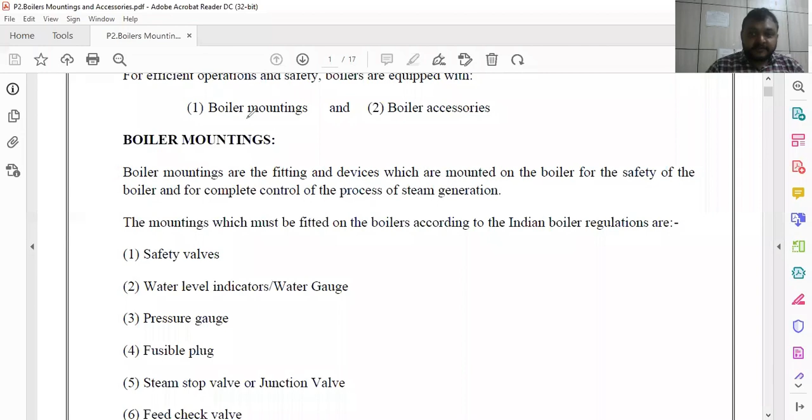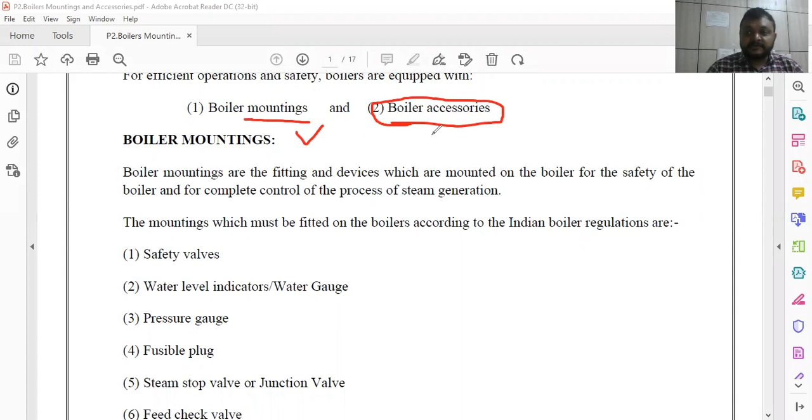So here you have to keep in mind 2 points. One is boiler mountings. Boiler mountings are specifically applied to boilers for the purpose of safety and effective performance, and boiler accessories are mostly used to improve the performance or efficiency of the boiler. Now, the fundamental difference between boiler mountings and boiler accessories is that boiler mountings are compulsory attachments to the boilers, whereas boiler accessories are optional attachments. If we add the boiler accessories, we can improve the performance or efficiency of the boiler.

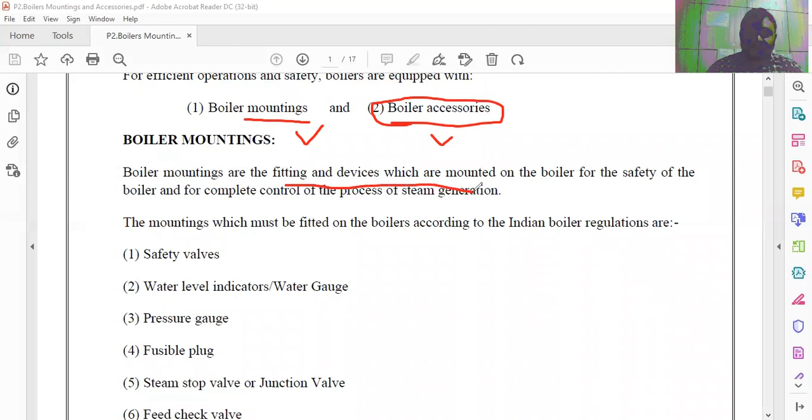So we have to see different kinds of boiler mountings first, and then go for boiler accessories. Boiler mountings are fitting devices, normally mounted over the boiler for the purpose of safety, so that we can effectively control the performance of the boiler from water to steam generation.

According to the Indian boiler regulation, the important boiler mountings which are compulsory to be fitted over the boilers are safety valves, water level indicator, pressure gauge, fusible plug, steam stop valve, and feed check valve. These are the important boiler mountings.

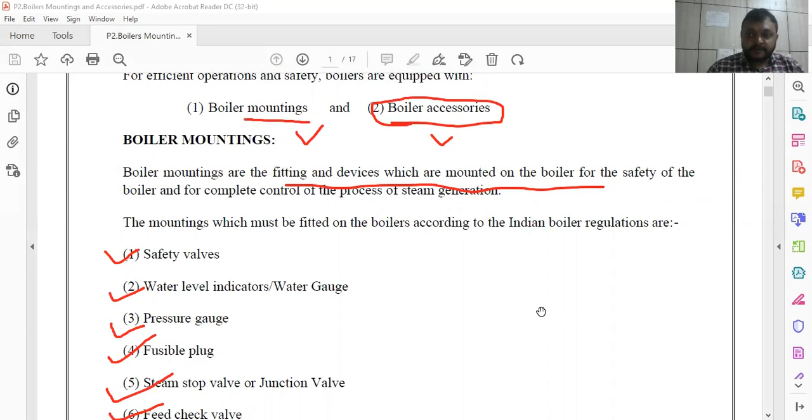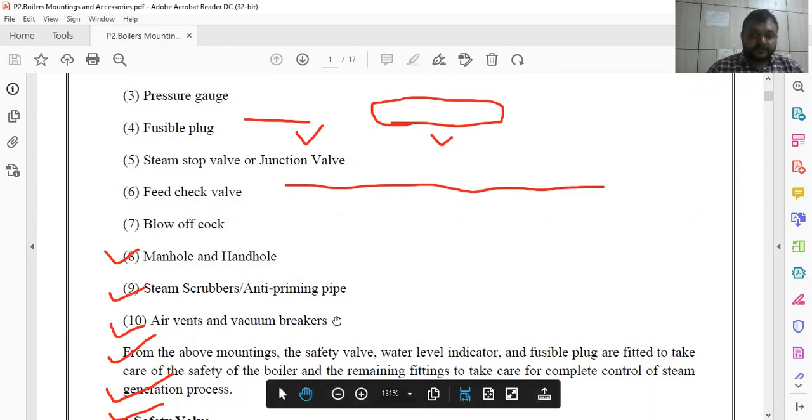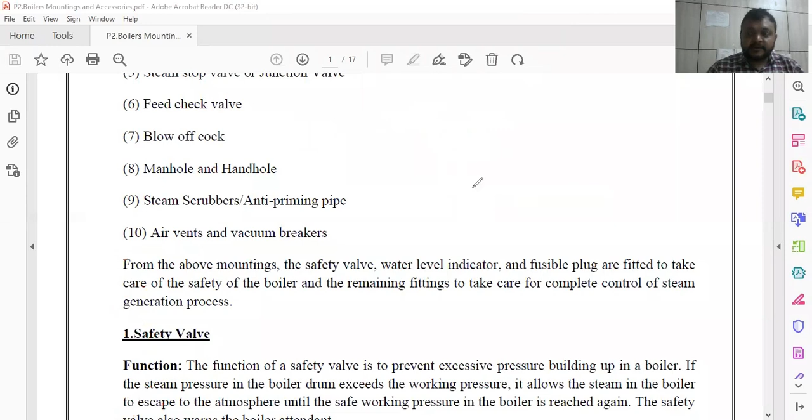Now we will see one by one the performance of each and how they help in the performance of the boiler: blow off cock, manhole, steam scrubber, air vent, and vacuum breaker. These last two are not so important, but we have to see each one by one so that we can easily understand how they help perform the boiler in the most effective manner possible.

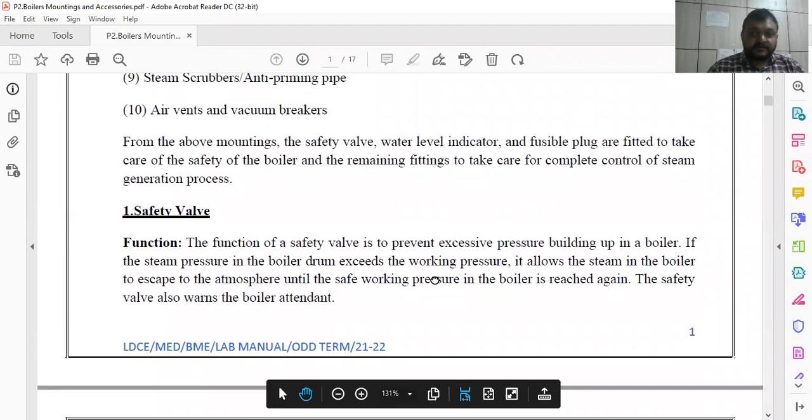So you have to see, we have the safety valves. Safety valve, first of all, we have to see the safety valves. Safety valves are basically used to prevent excessive pressure building up in the boiler.

So normally what happens in the boiler? In the boiler, normally we have to generate steam from the water, so that whenever steam is generated, water is boiled, temperature is increased, pressure is increased. So sometimes it may be possible that excessive pressure builds up in the boiler shell due to steam.

That can be managed by means of the safety valve. It is a kind of, or we can call it equivalent to, the safety valve of the pressure vessel that we use in our kitchen. So it is more or less the same.

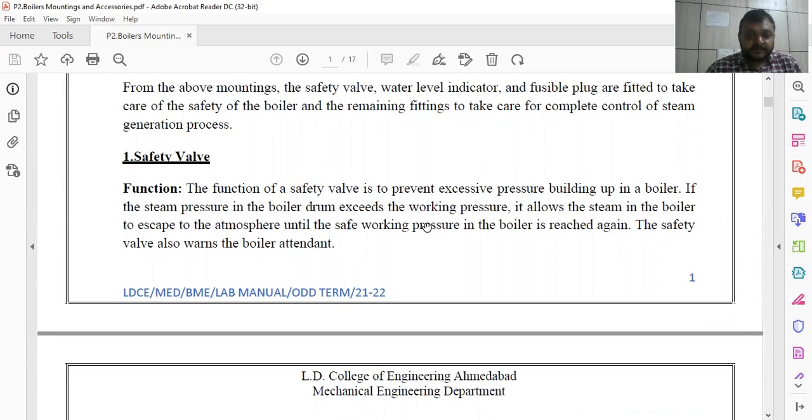The main principle of the safety valve is that the valve is pressed against the seat, just like our pressure cooker, against the seat through external force. So whenever steam pressure is increased inside the pressure cooker, what happens? That valve is lifted up because of the steam force, and excess steam is thrown away, so that pressure inside the pressure cooker remains constant.

So the working pressure is restored. That is the main concept, and a similar working condition is applied over the boiler with this safety valve. Safety valves are normally located above the steam pipes, in the steam space in the boiler.

Where steam is stored, steam is generated and then stored over the boiler shell. At that point, safety valves are normally fitted, and at least 2 safety valves should be there according to the act.

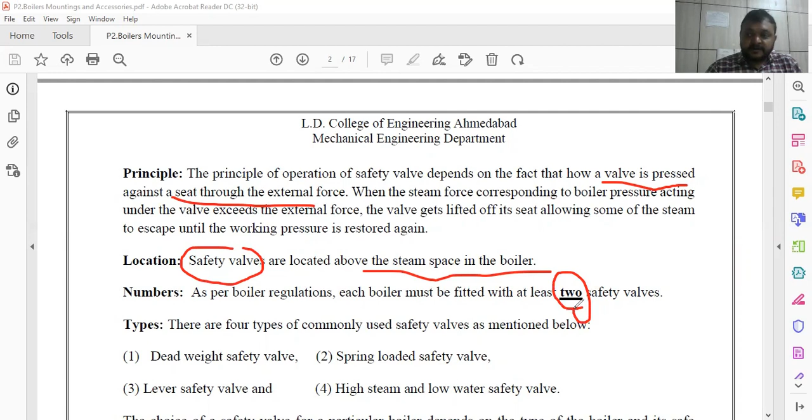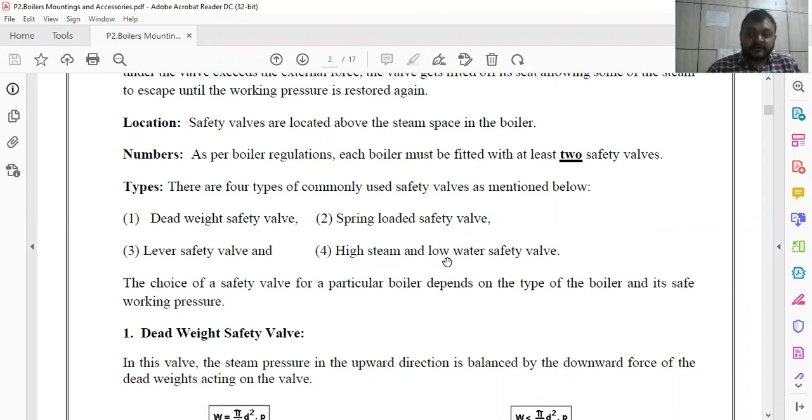Now, safety valves are of various kinds depending upon the working principle. You have the dead weight safety valve, which is normally used in our home kitchen pressure cooker. But spring loaded safety valves, lever safety valves, or high steam low water safety valves are also used in the boiler. The function remains the same. You can see the figure.

This is the steam space of the boiler where steam is on the upper side and water, because of its weight, is on the lower side of the boiler pipe. So here, what happens, just have to see.

This is the safety valve. The pink color is the safety valve, and force is exerted. Steam force is exerted over this valve. So whenever steam pressure exceeds, what happens?

Steam pressure acts over a pipe of diameter d. For example, load is equal to area into stress, or pressure. So pressure P is equal to load divided by area, as we discussed in the previous lectures. So load is equal to area into P, where area is the area of the pipe, pi by 4 d square, where d is the diameter of the pipe and P is the steam pressure.

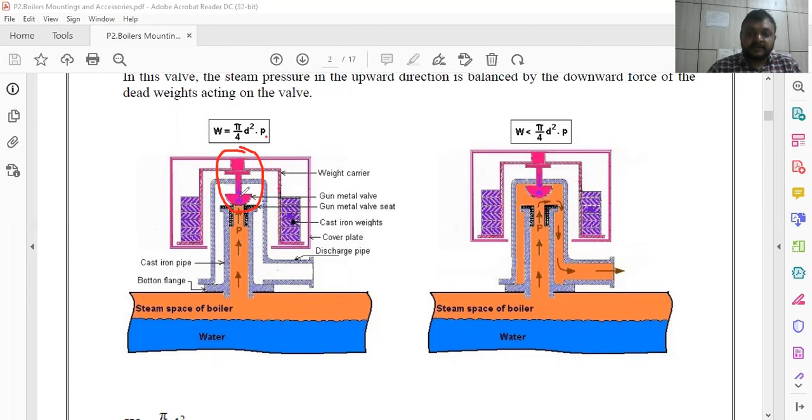So if you know the steam pressure, you can easily find out the load acting over the safety valve. Depending upon the load, you can set the weight of the safety valve, so that depending upon the pressure, it can be lifted when needed, or when steam pressure exceeds a certain limit.

So this is the closing of the safety valve, and in this figure you can see the opening of the safety valve. Whenever the safety valve is lifted, the excess steam is passed through this line and thrown away, so that steam pressure becomes optimal, as per the requirement. So this is a very fundamental, simple operation of the safety valve, and it works on dead weight.

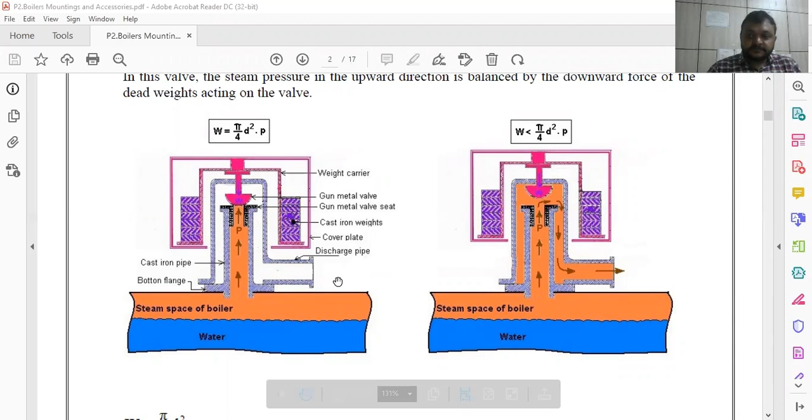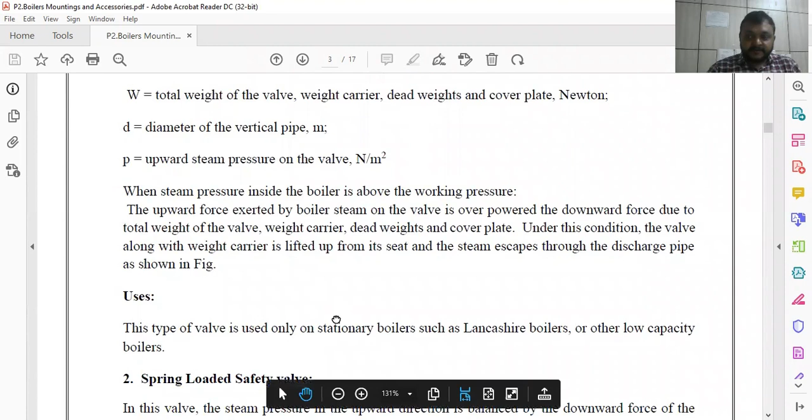So it works on dead weight. Now, as I already explained how we can calculate W and how we can find out the diameter, normally this kind of safety valve is used in Lancashire boilers or low capacity boilers.

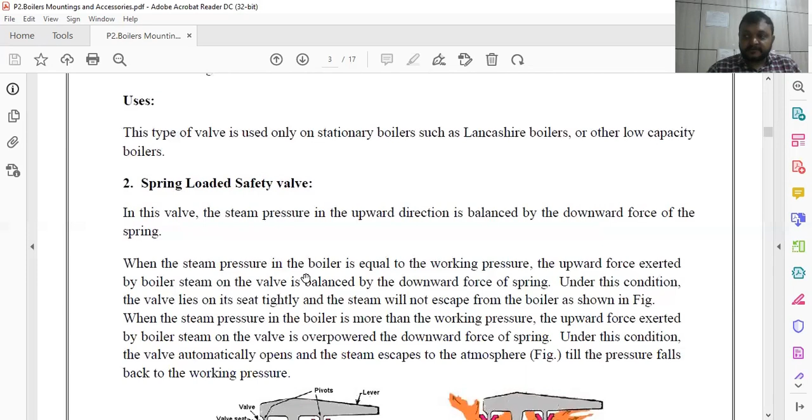But why are we using the dead weight safety valve on our pressure cooker? Because it is a low capacity kind of pressure vessel, normally used in the kitchen. But for a heavy loading condition, a similar thing is there.

But instead of weight, we are using a spring. Spring force is normally used to lift this safety valve. So here, instead of dead weight, spring force is exactly equalized to W. W means pi by 4 d square into steam pressure P is equal to spring force.

So whenever it becomes equal, up to equality, this safety valve remains closed, and otherwise it will open when steam pressure exceeds. W, meaning steam load or steam force, becomes more than spring force, and the valve is lifted and excess pressure is thrown away like this.

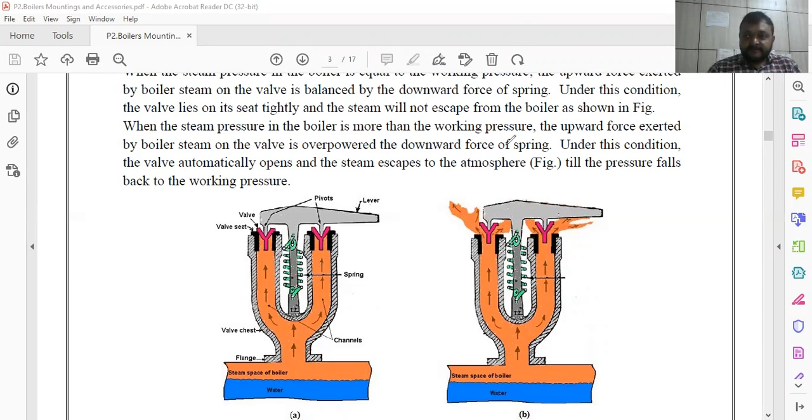This is a spring loaded safety valve, based on the principle that a spring is attached. High capacity boilers normally use these kinds of things in high pressure boilers.

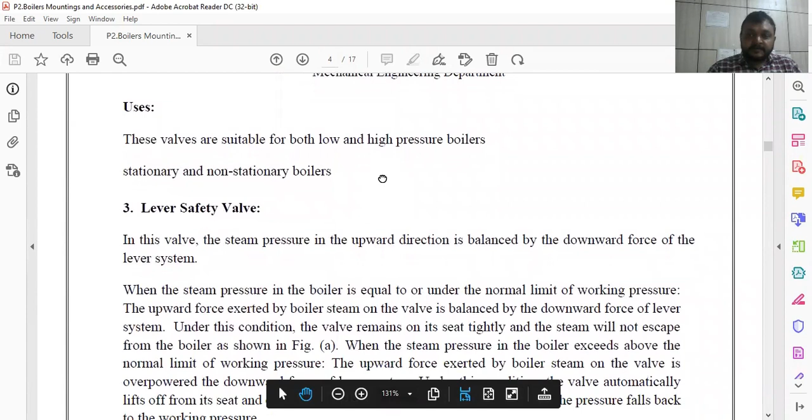And instead of a spring, we can use levers. Here you can see the lever, one lever edge is on this fulcrum point. This is the fulcrum point. So the lever is lifted like this, as you can see in this figure.

The load weight is already attached over the other end of the lever, and when it equalizes or exceeds W, meaning steam load or steam force exceeds this lever load, the lever is tilted with respect to this fulcrum point, upward, so that the safety valve is lifted up and excessive steam is thrown away to neutralize the steam pressure inside the boiler.

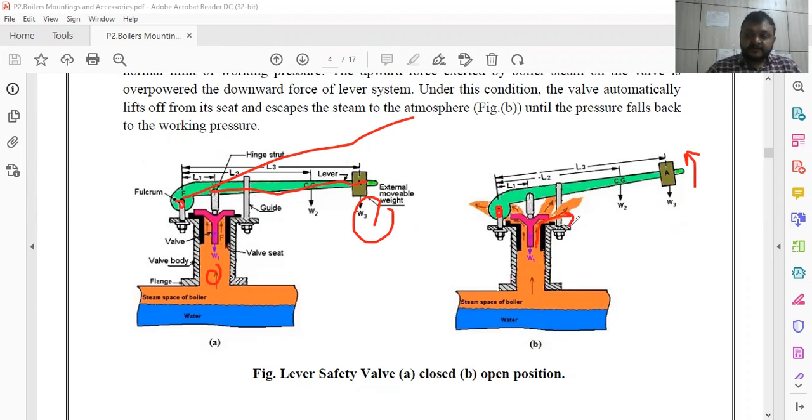So there is less chance of accident. This is about the spring loaded safety valve and lever safety valve.

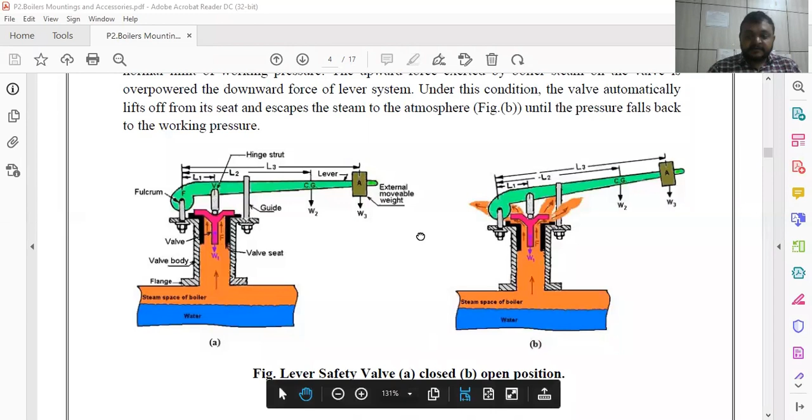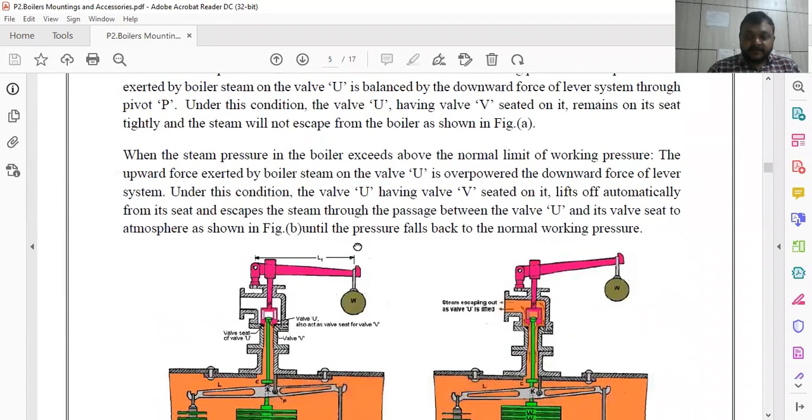And a high steam and low water combination safety valve is also used here. You can see this figure where high steam and low water are shown. So when the steam becomes high, meaning the pressure of the steam is exceeded, at that time also this safety valve is lifted.

And the second thing is, even if your water level goes down below the required limit, then also the safety valve works. So this is the closing condition, and this is the opening condition.

Load W is there on both sides. You can read the discussion that I will explain. The kind of lever is there with respect to this fulcrum point, and load is attached over this, and another end is immersed in the water. So even if water level goes down, this lever will be rotated towards this direction.

So the combination of three loads are arranged here under the circumstances of high steam as well as low water. This is the combination. Normally this kind of safety valve is not used for routine purposes. However, we can use it.

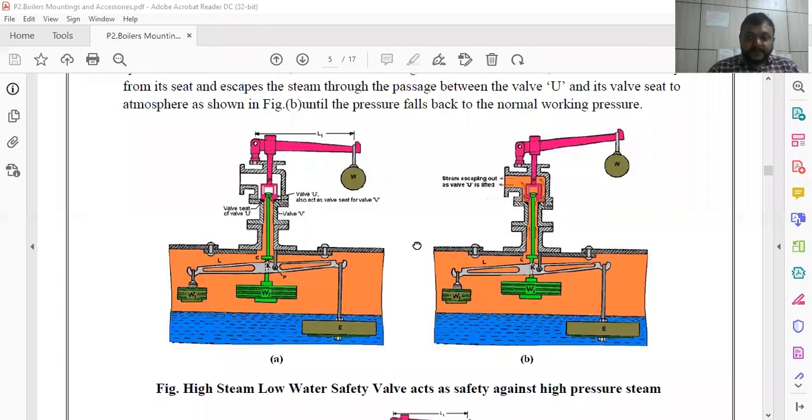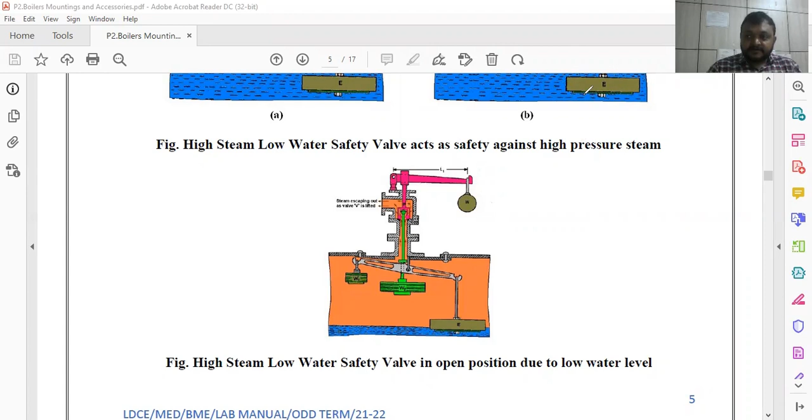Here you can see the low water level. In case of low water level, this becomes down as the buoyancy force is reduced. Automatically this end of the lever will become down, and because of the downward motion of these slings, this becomes up in case of low water level, and the valve is lifted up, so that the alarming signal will occur so we can feed the water as quickly as possible.

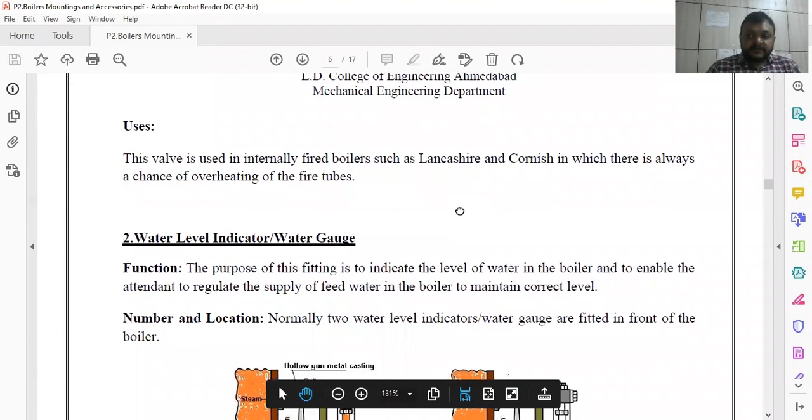Normally used in fire tube boilers to overcome the overheating of the fire tubes.

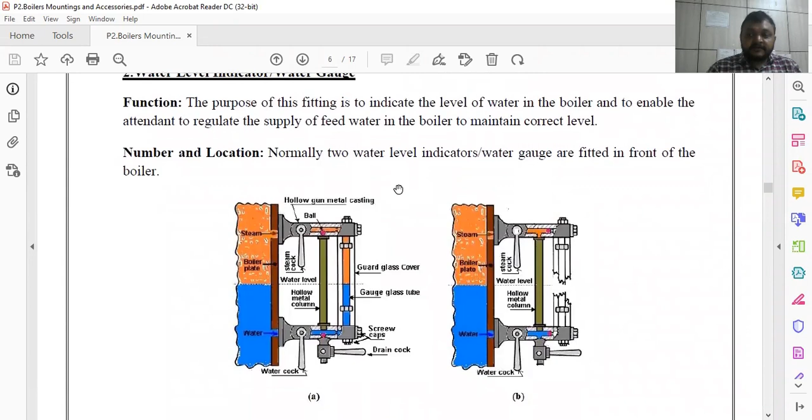Water level indicator is normally a kind of level tube. You can see the water level indicator, also called the water gauge, fitted in front of the boiler as shown in the figure.

Here what happens, you have to see, this is the inside of the boiler. This is the boiler wall or boiler plate. And this is the outside of the boiler, the outside arrangement.

Inside the boiler there is a level of water, and on the upper side steam is already there. Whenever steam is generated from the water, it goes towards the upper side. So at the steam side one opening is there and one tube is attached, a glass tube attached by means of nut and bolt.

At the same time, at the water level, another glass tube is attached with nut, bolt and screws. This is the drain cock, by means of which you can open or close this valve. The steam cock is also there, same as the water cock, so that you can open, close, or partially open or close the tube depending upon the level of steam and water.

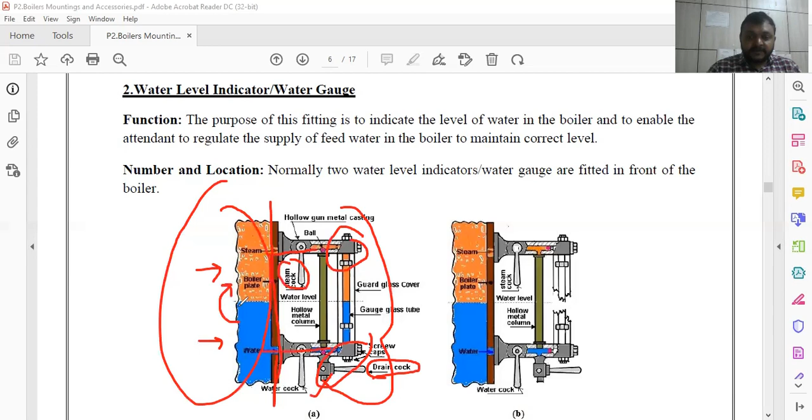Now it works exactly on the principle of the level tube. Level of water remains the same at any point on earth, so if water level becomes high, for example like this, automatically this becomes high too. On the outside, you can easily recognize the exact level of water and steam inside the boiler, because we cannot see the inside view of the boiler directly since it is very hot, so we arrange such a thing.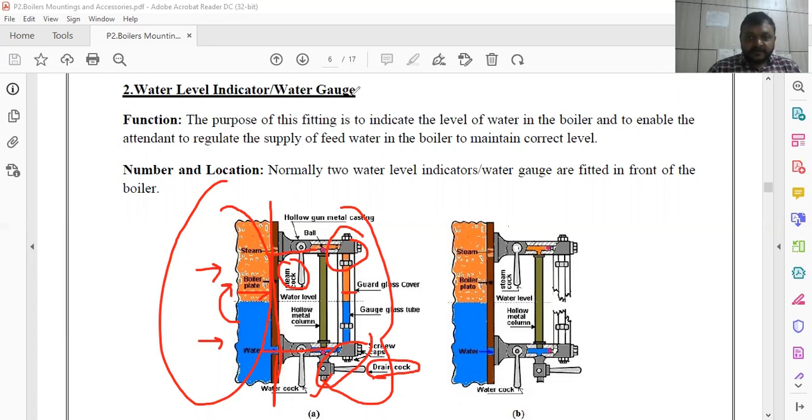Depending upon that, if water level becomes low, we can feed the water; if it becomes high or steam level low, we can drain the excess water, and the same for steam. So this is about the water level indicator.

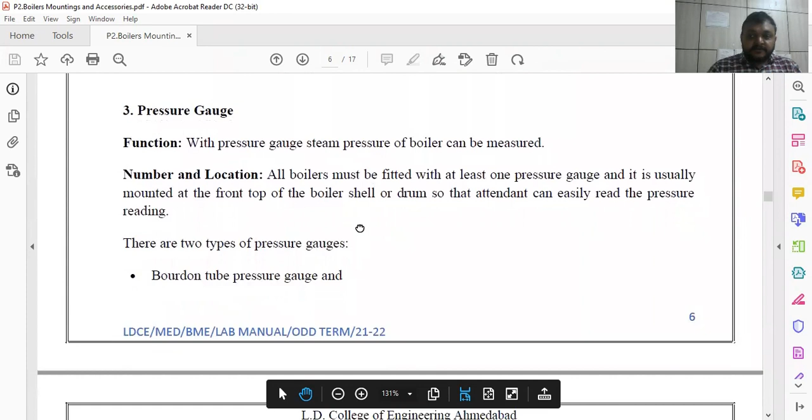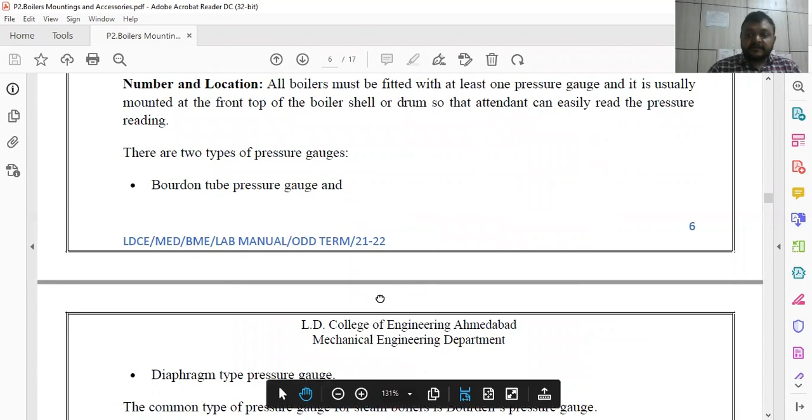Then the pressure gauge, normally used to maintain the steam pressure, or you can directly measure the pressure. The pressure gauge indicates or directly gives the measurement of pressure inside the boiler, and it works on the Bourdon tube. I will show you the working of the Bourdon tube.

Here you can see this is the boiler, inside the boiler, and at the steam exit one tube is fitted. You can see the siphon tube, a U-shaped tube, connected to this Bourdon pressure gauge. Now the Bourdon pressure gauge is a flexible gauge made of elastic material.

So what happens here? Just concentrate on this blue line. This is the blue line, circular, it is the blue line.

Now what happens whenever steam pressure is increasing? Steam pressure exerts force over this, and when this force is exerted, this blue colored Bourdon tube will expand, meaning it moves towards the outside. So initially it is like this, but under the condition of expansion, it is like this.

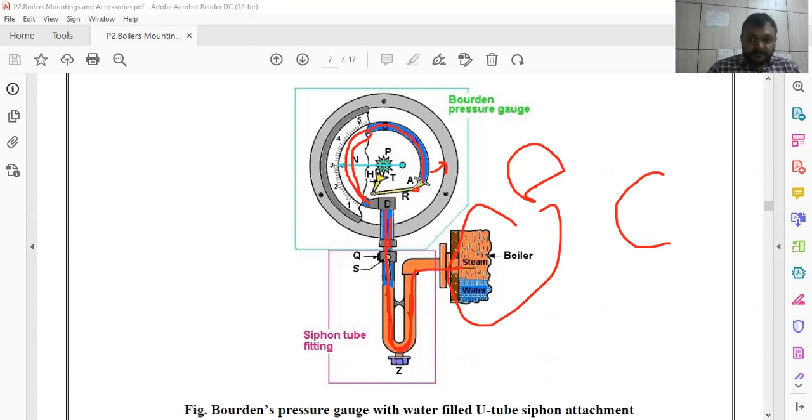You can see a rod is attached to the end of the Bourdon tube with the gear. So it is lifted, moving towards this side, and it exerts force so that this lever will move. This lever is arranged with a gear connected to a scale, and it moves clockwise under the action of the steam. When the Bourdon tube expands, it works clockwise, so this indicator will move up on the scale, from 3 to 4 to 5, depending upon the pressure.

But what happens in case the steam pressure goes down? This Bourdon tube will contract, not expand. Under the action of contraction of the tube, this gear will move anti-clockwise, so the indicator attached to this gear will move downward on the scale.

So the main function of this is expansion or contraction of the Bourdon tube under the action of the steam pressure coming through the siphon tube. So two tubes you have to keep in mind, Bourdon tube and siphon tube. Siphon tube is a U-shaped tube where orange color represents steam and blue color represents water. The Bourdon tube expands or contracts against the steam pressure and gives an indication on the scale, so we can easily measure the actual pressure inside the boiler by means of this Bourdon tube. This is a very simple phenomenon.

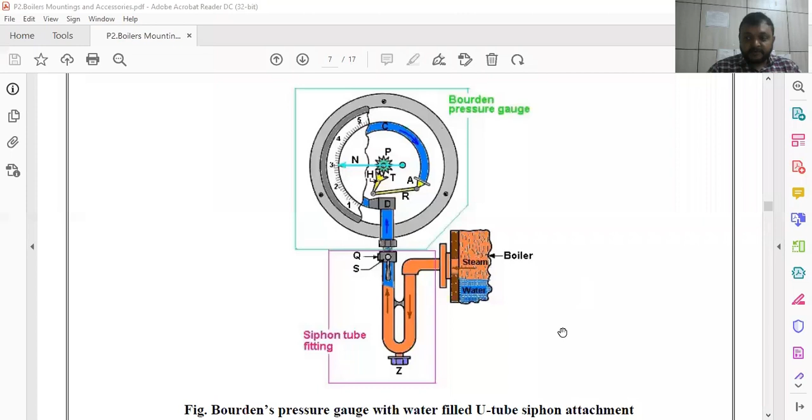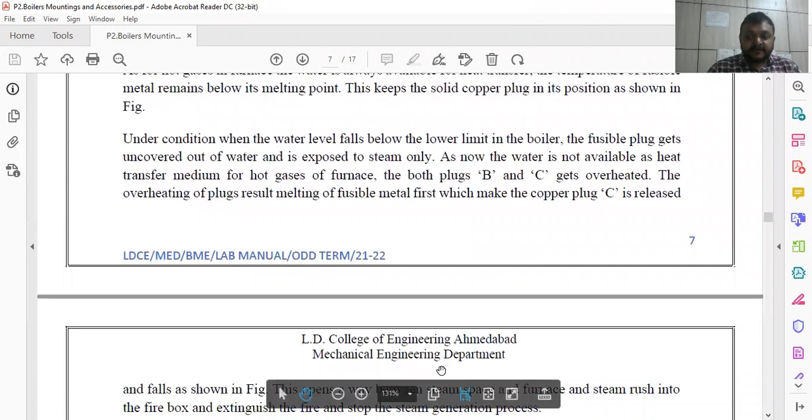Then the fusible plug. A fusible plug is just like our MCB, an electrical plug, a spark plug that we use in electrical systems—that kind of thing is there.

The fusible plug is normally attached at the furnace, where the water space is. Here you ignite the fuel in the furnace area so that water gets heated and converted into steam, which goes upward. These are the flue tubes. Now, if the boiler is under an overheating condition, one fusible plug is attached here.

This yellow color represents flue gases, and this green color is gun metal—you can see the gun metal plug here, this light blue color. Then there's a solid copper plug, this pink color, and fusible metal, this dark purple color.

So whenever overheating occurs, depending upon the thermal conductivity of this fusible metal, if a certain temperature limit is exceeded, this fusible metal automatically liquefies and melts. As a result, the connection between the gun metal plug and the solid copper plug is disconnected, and the solid copper plug is thrown downward. When it falls downward, the water inside the boiler enters the furnace and closes the fires. That is how the furnace is closed and further overheating may be prevented.

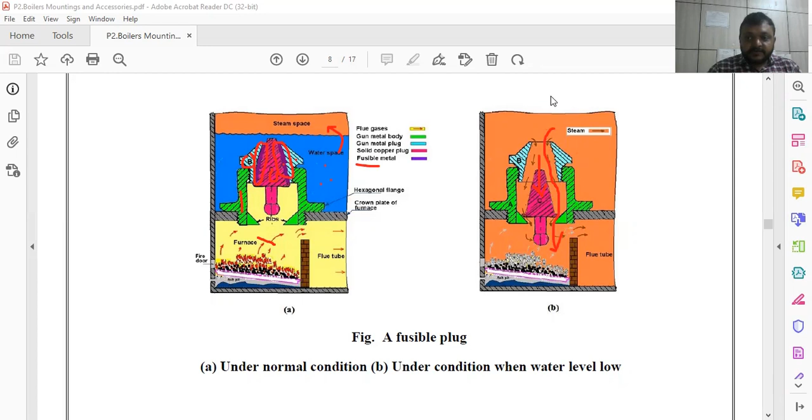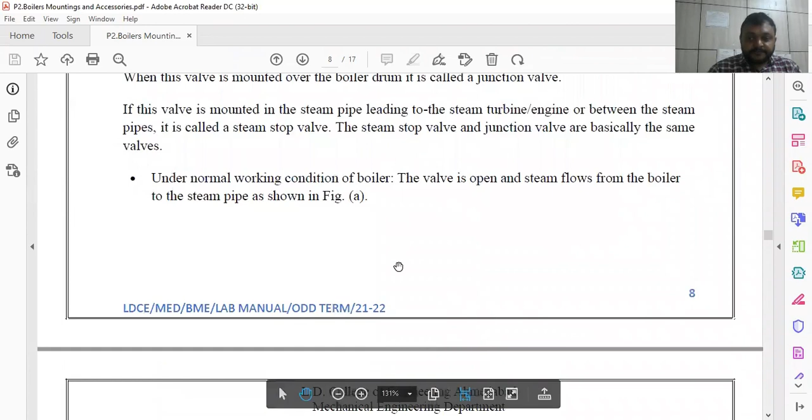So this is simply a kind of electric plug, like an MCB kind of thing. That is about the fusible plug—a very simple fundamental concept that you can easily understand. We also have the steam stop valve to stop the steam, depending upon the requirement.

This is the hand wheel, pink color is the hand wheel, for closing. Steam is normally stored at the upper side of the boiler shell, and depending upon the requirement, by means of the hand wheel you can open or close the steam valve, partially open or close, as per the requirement steam is supplied through the steam pipe to the further application.

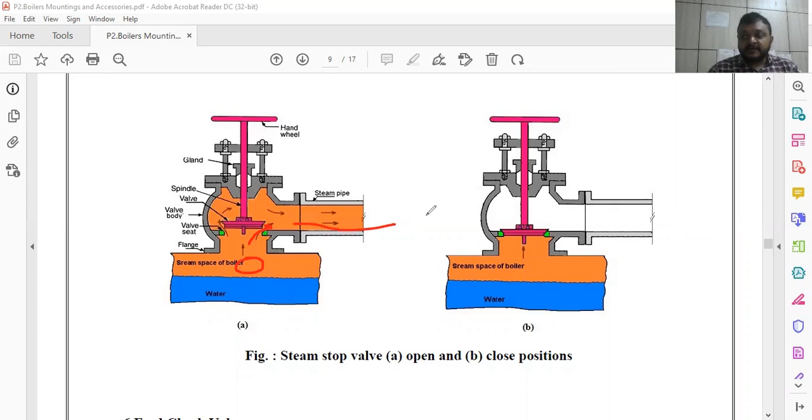Like suppose we have milk to reheat in the dairy, then steam may be required depending upon the temperature. If you don't have much requirement of steam, you can directly close this steam stop valve by means of the hand wheel and control the flow of steam. If you need more steam, you can open it; if you need less steam, you can partially close this steam valve. So this is about the opening and closing position of the steam valve.

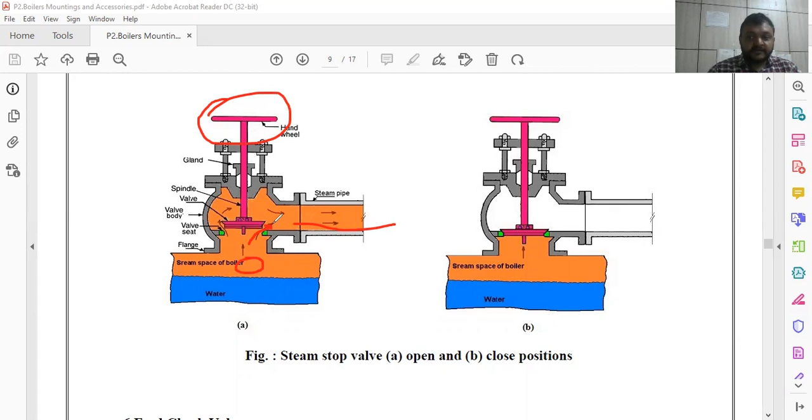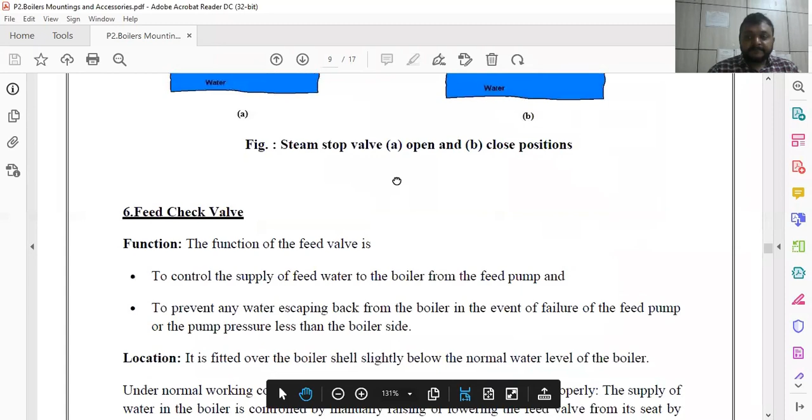This is the opening position of the steam valve where steam is flowing inside the steam pipe from the boiler, and this is the closing position where the steam pipe is empty. So this is about the steam stop valve. By means of the steam stop valve you can control the flow of steam.

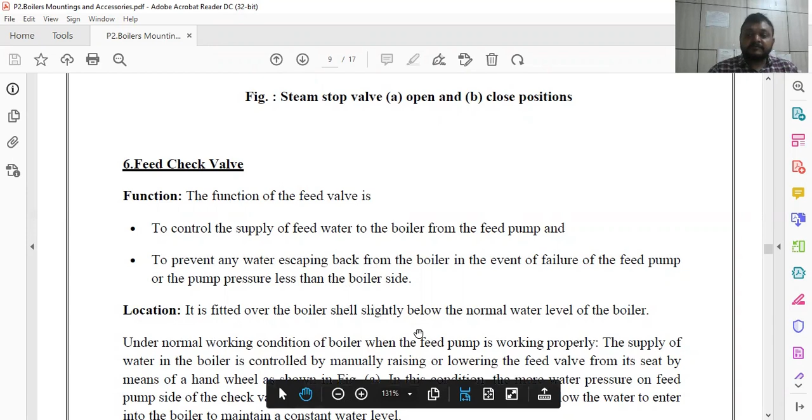Similarly, you can also control the flow of water that you supply inside the boiler by means of the feed check valve. The steam stop valve controls the flow of steam generated from the water, and you can also control the supply of feed water to the boiler from the feed pump.

In case of low water level, you can make it open; in case of high water level, you can stop the supply. Similarly, a hand wheel type valve is there, a pink colored valve, where this is the water space, this is the boiler space, and this is the pump from where we can have the water. So water is supplied from this.

This is the opening position by means of the hand wheel, and you can supply feed water inside the boiler. Under normal condition it stays open, but in case of failure of the feed pump, this metal moves downward and blocks the whole system, so no further water is allowed to enter inside the boiler. It is automatically closed under failure of the feed pump.

This is famously known as the feed check valve.

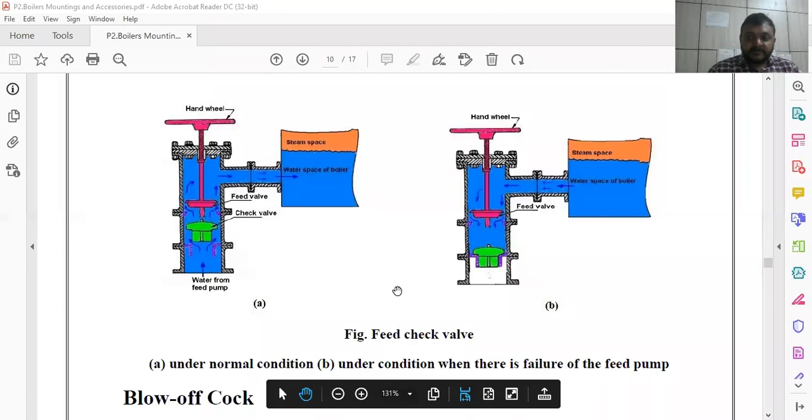Then the blow off cock. Blow off cock is normally an opening inside the boiler, a kind of door at the bottom of the boiler, by means of which sediments, sludge, loose scale or impurities are periodically cleaned out from the boiler. By opening this blow off cock, you can empty the boiler whenever necessary for cleaning and inspection.

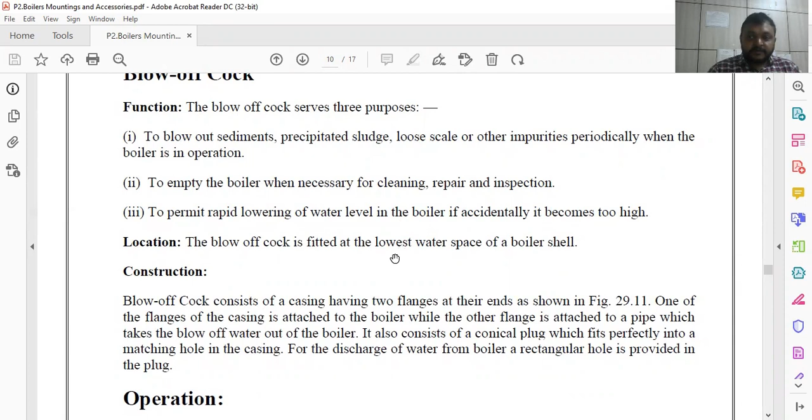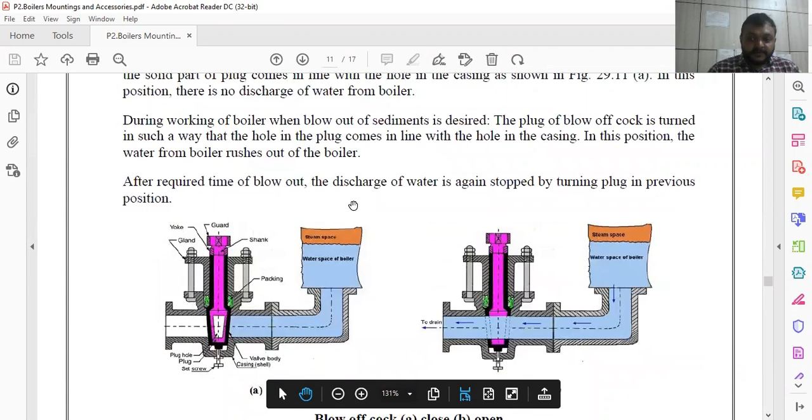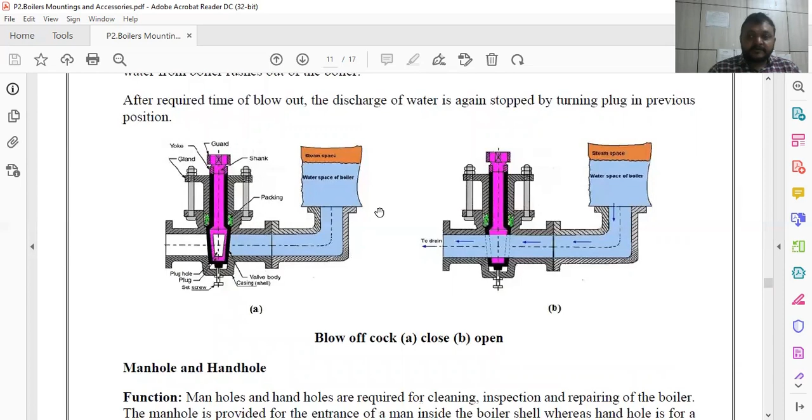This is normally fitted at the lowest water space of the boiler, so it can easily be thrown outside under gravity, and we can easily clean the boiler. Here you can see the position of the blow off cock, its opening. Under drainage, under the action of gravity, we can easily clean the boiler. This is the closing position and this is the opening position, so extra sediments or impurities can be thrown out.

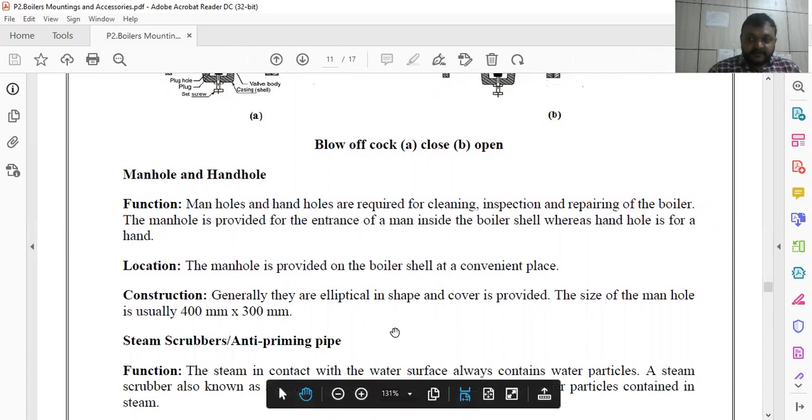The manhole is the cover or door for the purpose of cleaning, inspection and repairing of the boiler, through which a man can enter inside the boiler and clean or maintain it. The size of the manhole is usually 400 by 300 mm, so that one man can easily enter inside the boiler.

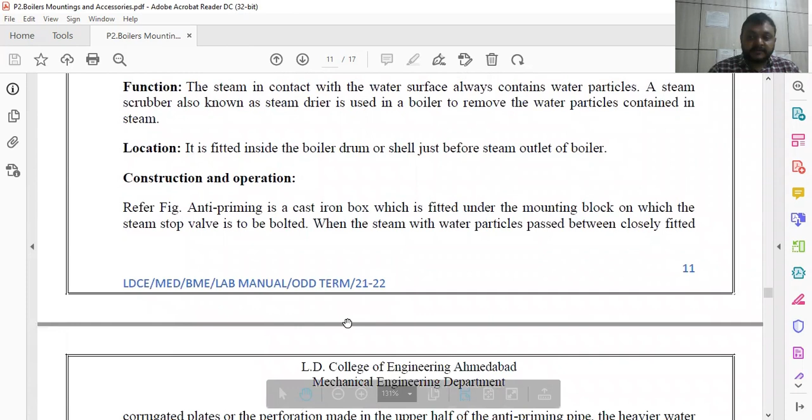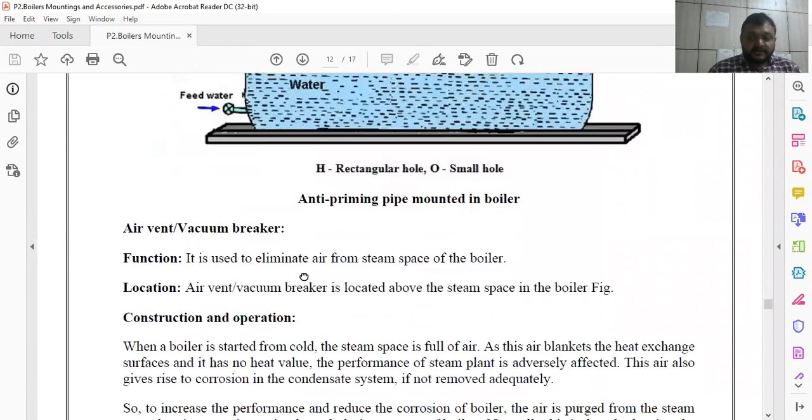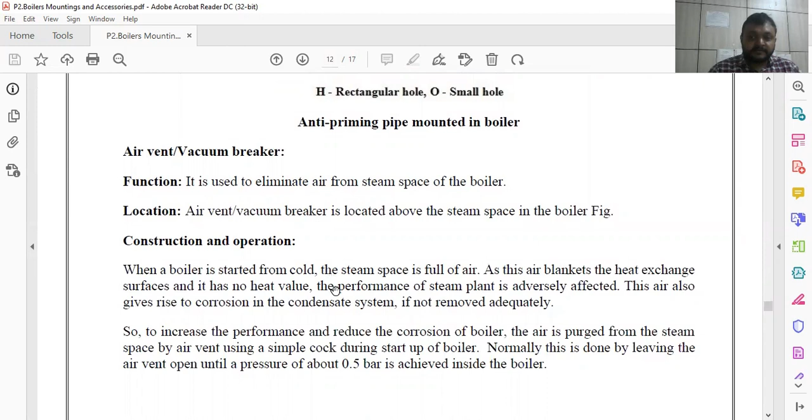Also, steam scrubbers or anti-priming pipes are used, like whatever we use in the centrifugal pump, so that priming can be easily maintained. Sometimes vacuum is created and vacuum may be hazardous, as it can stop the flow of steam, so it is broken by means of the vacuum breaker.

So this is about the boiler mountings. In the upcoming session, we will see the boiler accessories. Please keep in mind that boiler mountings are compulsory attachments inside the boiler, whereas boiler accessories are auxiliary attachments only used to improve the efficiency of the boiler. Thank you all.